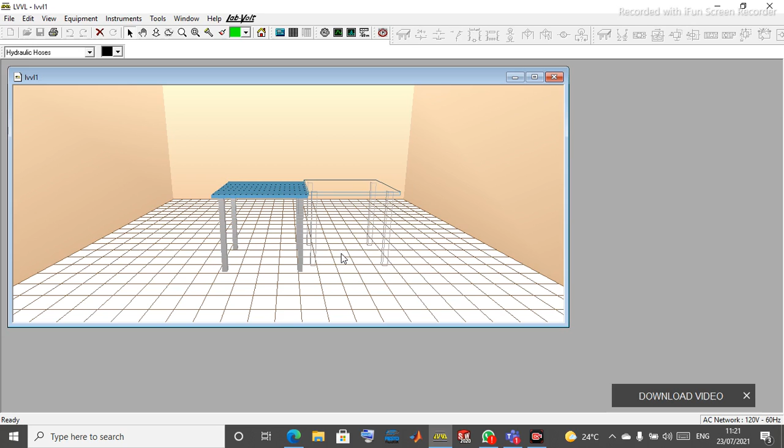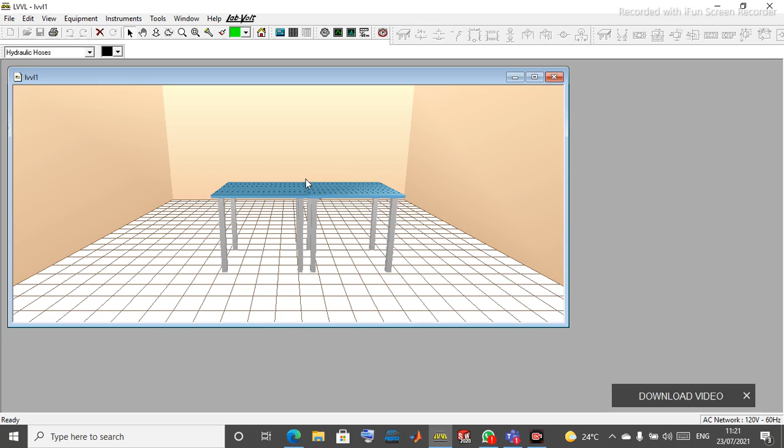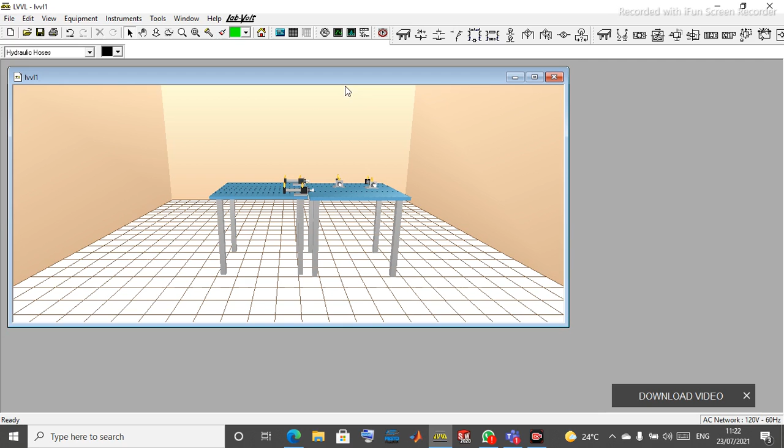As we have said, we are going to make a circuit composed of 4 cylinders, so you have to pick cylinders. It does take double acting cylinders. So take 4 cylinders like this one. As you can see, I'm taking 4 cylinders.

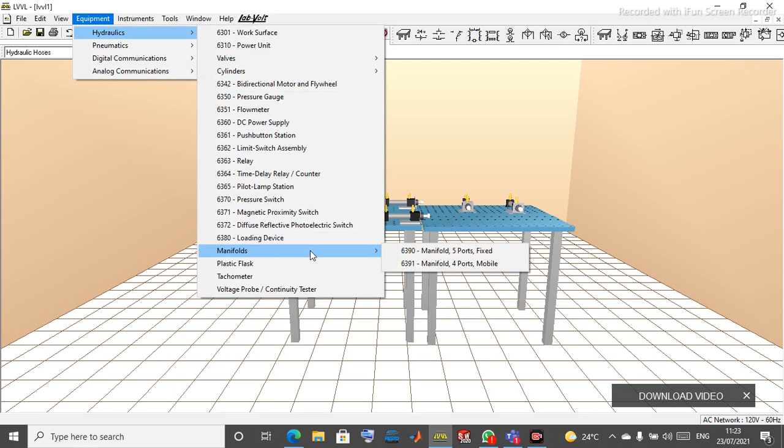So in order to be able to connect those cylinders in a parallel circuit, we will need an input manifold and exhaust manifold. So we come over to the equipments, hydraulic equipments, select manifolds. It does pick 5 ports fixed manifold. As I've said, we will need 2 manifolds, so let me take another manifold here. Five ports manifold.

As we know, you have to put also power unit, so bring power unit, then fix it here, and bring DCV to control all those cylinders at the same time. Bring DCV valves, then let us take lever operated DCV.

So as you can see here, we are having all the equipments we are going to use. So now we are going to install it. What do we mean by parallel circuit? When we say a circuit is parallel, it means it is independent of each other. It means one can work while other is not working. So it means it will have its own input and its own output.

So let us take this manifold as one for input and another for output. So to supply this manifold, we should have the cables from this DCV, because we are having this DCV which is going to control all those cylinders at the same time.

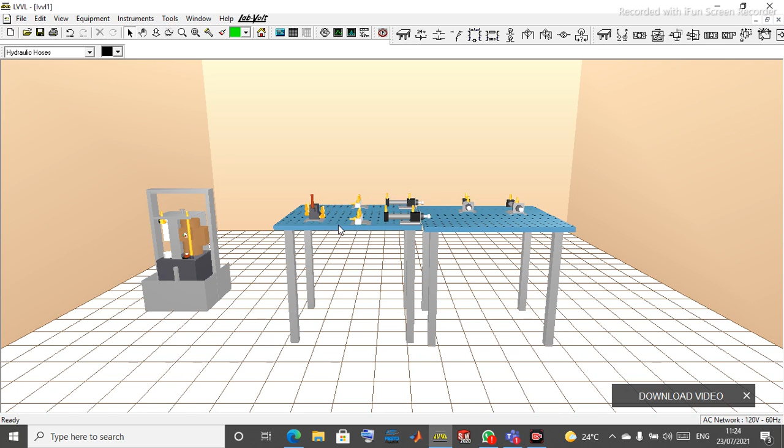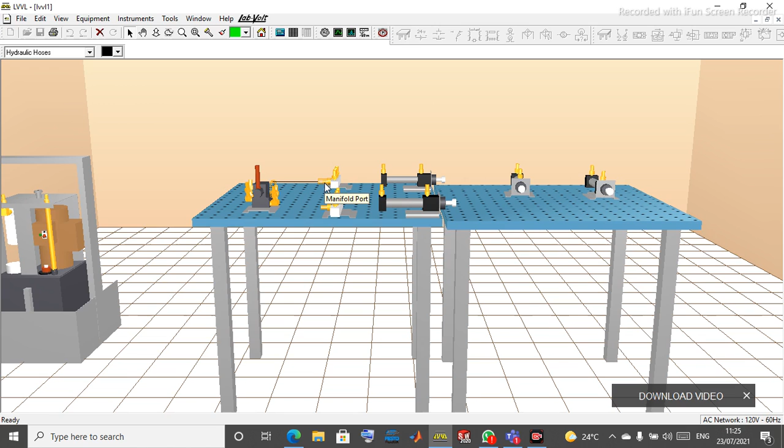So what do we say? As usual, as you know, here for DCV, A port is for input. It means A port supplies the end cap port for top dead center, bottom dead center, sorry, of the cylinder. So we have to take this A port and connect this with the input manifold, and B port make it to the exhaust manifold.

As you can see here, we are having two supplies: input supply and output supply. Each and every cylinder here is going to have a supply from input and a supply from output manifold. So let's supply this first cylinder.

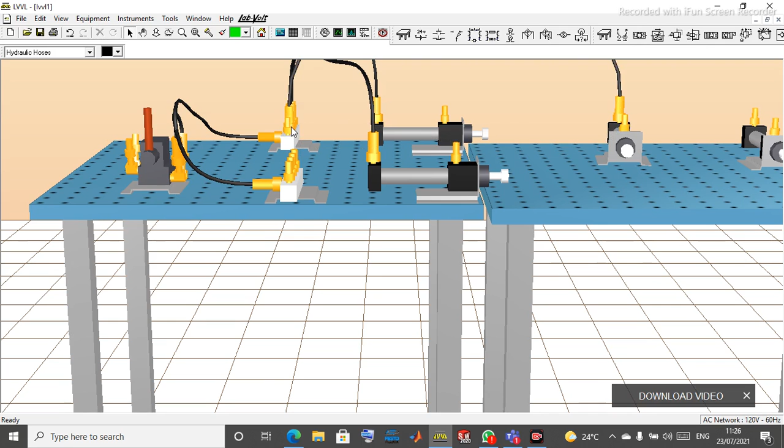Take input supply. The second cylinder, take the input supply. Third one, let's take input supply. Then the fourth one, let's take input supply. So as you can see here, we're supplying input for each and every cylinder.

So let's take differentiation colors so as to allow this cable to not be so challenging. Let us paint this input supply with red color. Let's paint red, this one red, and red.

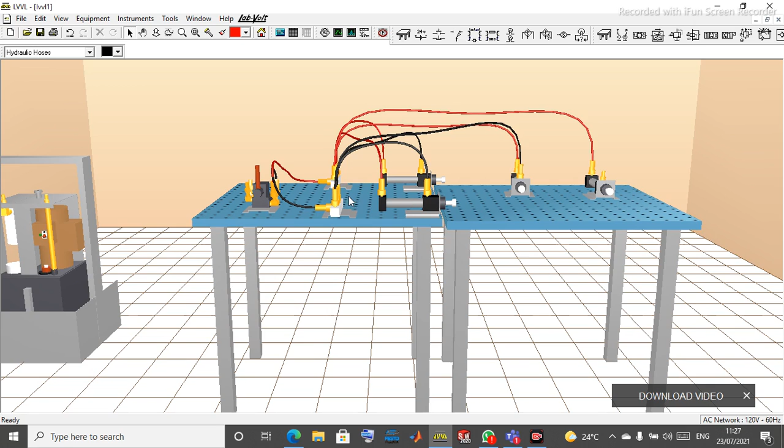So as you can see here, we are going to supply output for each and every cylinder. Supply output here, output here, and output here, another one here, and the other ones should be supplied too.

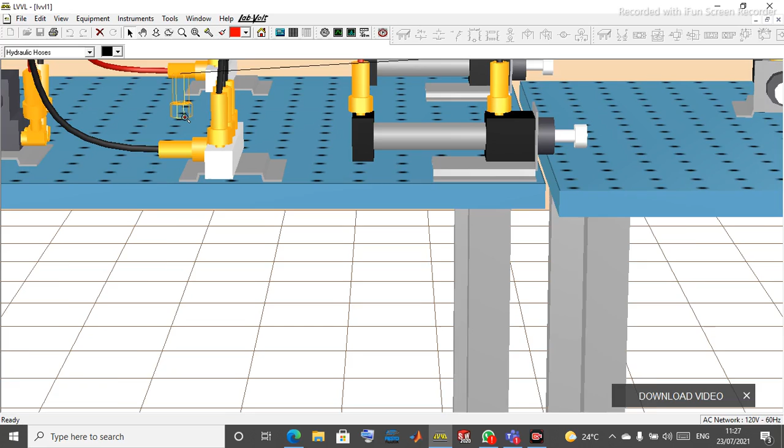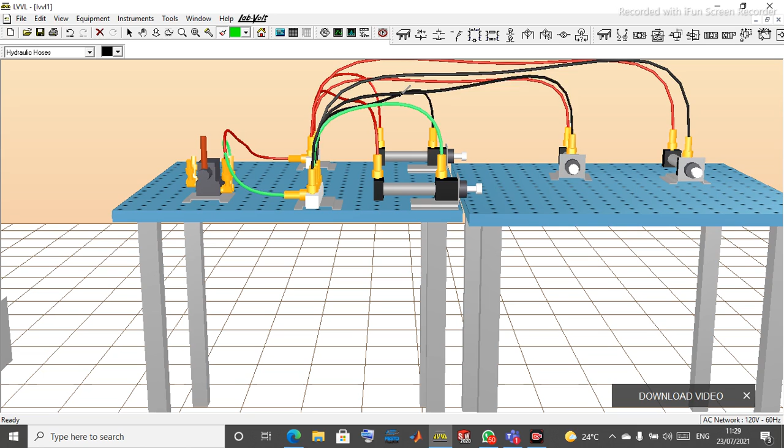So here, as you can see, we have supplied all input and output. So let us paint these cables of output with green color. Let's take green color, green color. So we are done.

Let us supply the cables from the pump unit. As you know, let us connect tank to the tank port from the pump. Take this one. Let me take this one for a better view. This one, as you see here, we are having pressure port, supply pressure port of the pump.

Let's paint this one too. Pressure port, let's paint red one, and return port, let's paint green. So we are done. We are going to simulate this one, so as you can see what's going on there.

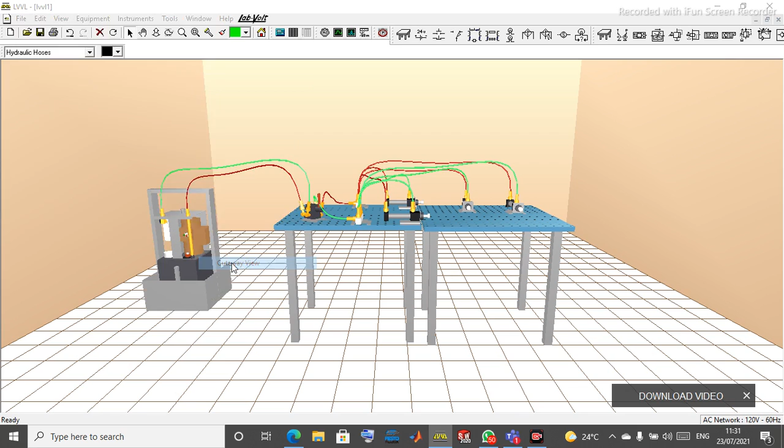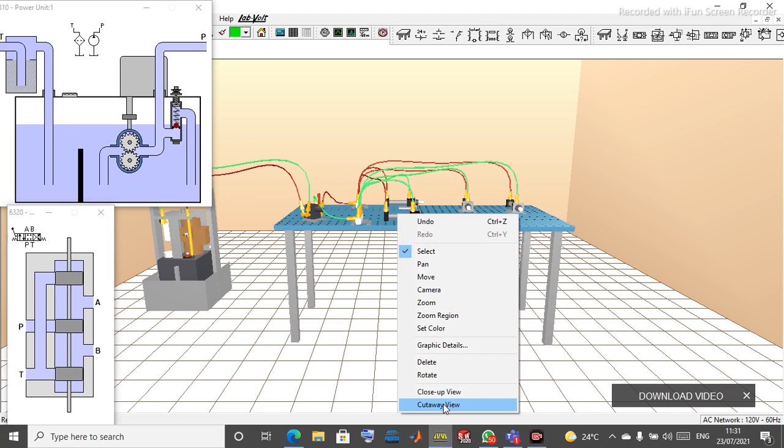So let me make a cutaway view for each type of component to see what is going on inside there. Let's take this cutaway view of this DCV. Let's take cutaway view of this cylinder, this one. Cutaway view of the second cylinder. Cutaway view of the third cylinder. Cutaway view of the fourth one.

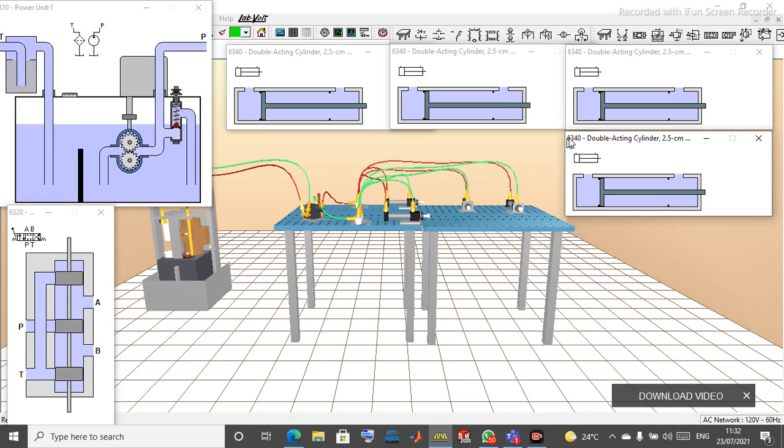This is us making cutaway views to see what is happening there. So let us learn. As you can see here, when we begin, we have to switch on the pump. So the oil is coming from the pump to the system, reaching the DCV, but because we are in off position, the oil is not having the way to pass to the system, to the manifolds. So the oil is automatically going back to the tank with the help of relief valve.

So let's make a cutaway view for this manifold too. That will help us to understand more. As you can see, this is the output manifold. Let's make cutaway view of this output manifold.

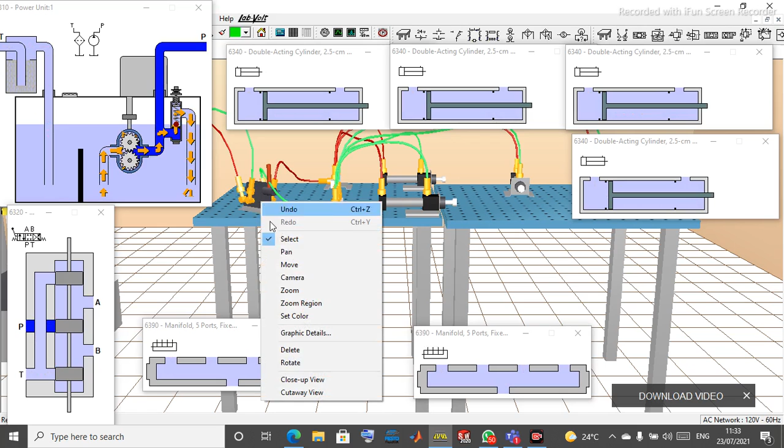As you can see, you can move the lever so as to raise all those DCVs up and down. So let's do so. When we are raising up DCV, you see, as you can see here from the graph, the oil is coming from the tank, from the pump, then reaching the DCV, and then by operating the lever of DCV, you are allowing the oil to go to the manifolds. So each and every manifold is supplying the cylinder.

So for lowering the piston, it means we are just supplying the oil through output manifold, so each cable which is connected to this output manifold is going to be supplied with the oil. And then, as you can see here, this

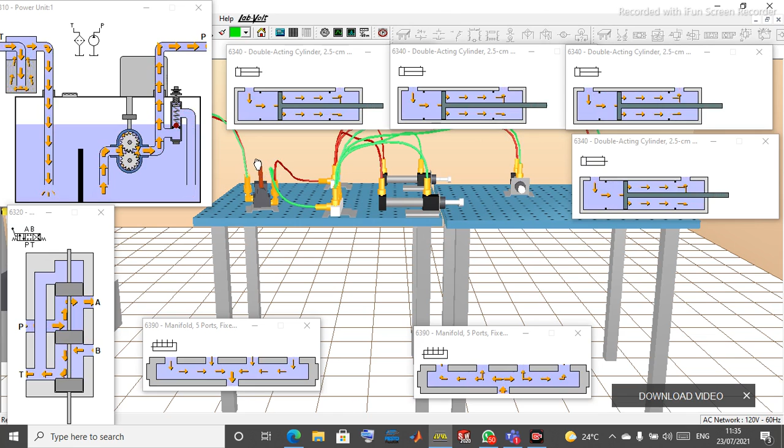But for here in parallel, as you can see, all cylinders reach the top dead center at the same time. See here. So this parallel connection will be very versatile and will be very good, and it will be just supplying very high energy compared to series circuit.